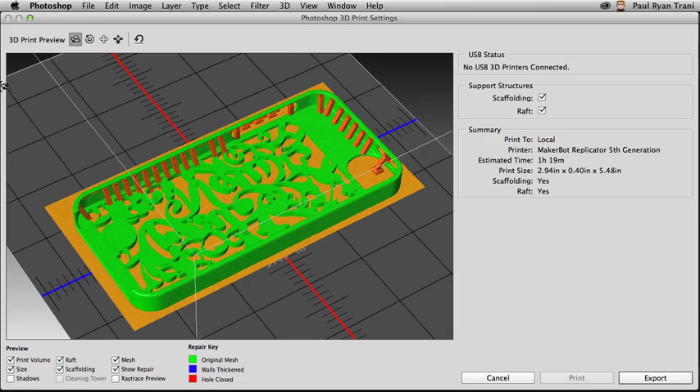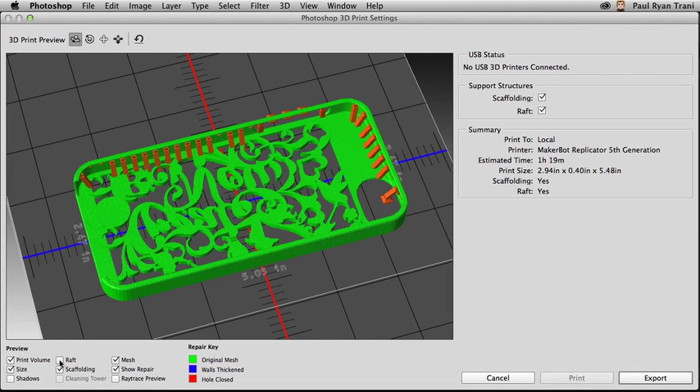All right, here is my object, and a couple things have happened. In fact, it looks a little unique. You can see the original mesh, which is the green, and notice I can click on Ray Trace Preview to get a more accurate preview of this particular object. But I'm also noticing this orange right down here, and what is that? Well, that's the raft. I'll actually turn that off, and you can see I can print the raft, which will just print out one layer, so this design will get positioned and printed out exactly right.

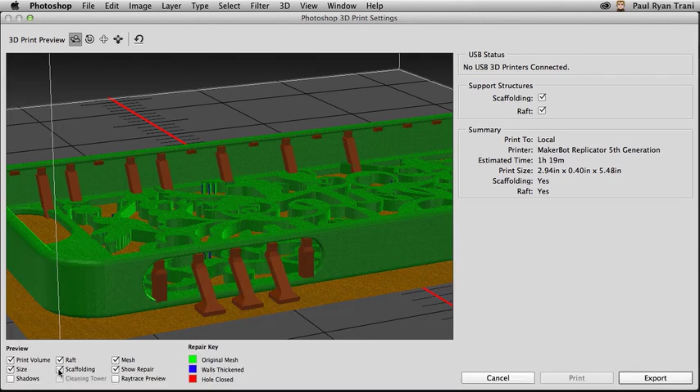But there's some other things going on here as well. As I rotate this around, notice how I can manipulate it and zoom in. Say, for instance, look what I have here. That's the scaffolding. Okay, so I can turn that on and off. And what that is: 3D printers can't just print in midair, if you will. So printing out this bar, it has to build up the scaffolding and then it can print that particular part. So this is great that this is actually integrated. Photoshop adds it for me so I don't have to put it in there. And now that's going to lead to a successful print for me.

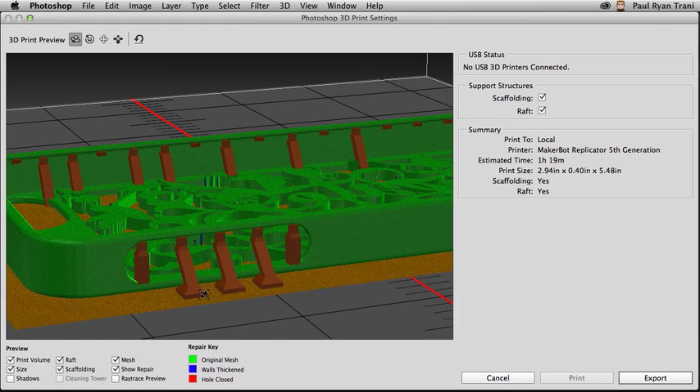Also notice the walls are thickened in certain spots, and that's what that blue is, again, leading to a successful print. I can click print or export to export out the STL if I want to print it out later. But what if you don't have a 3D printer? I'm going to click cancel. And check this out. I can take this iPhone case and send it to Shapeways or Sculpteo, two companies that will do the fulfillment for me.

This is great. I can select Sculpteo, they're based in Europe, and I can go into the printer details right in here and see all the different materials. So I can print out in ceramic, in multicolor. This is key. And Photoshop allows for printing in multicolor, which is great. Different plastics, different resins, clear down to wax, silver, metals, awesome.

In fact, I'm going to change this to Shapeways, based in Brooklyn, and you can see the ceramics, 14 karat gold, silver, steel, you name it, even full color sandstone. So I can create something with color and print it out as well. And keep in mind, it changes the visual representation. So for gold plated, well, this might be a little large for that printer, but if I change this to the coral red, strong and flexible plastic, that's what I want, and you can see it will easily fit, okay?

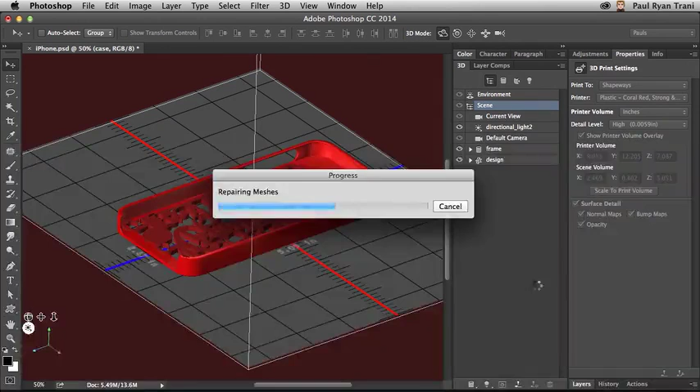And it will add all those details and anything I've refined. If I had a bump map in here to give it some texture, it will get printed out accordingly. But again, the great thing is I can come right down here and click Start Print. It will go through the same process of unifying the scene, making it one solid mesh, repairing it where it needs to be repaired. And here you get the representation again as well.

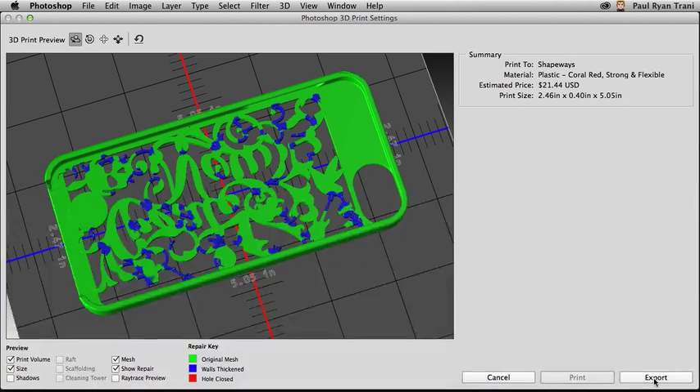And right over here, a little summary of how much it will cost, around $20 for this plastic case. That's all based on the amount and type of material you use, but you can easily see that it thickened all of these walls, so it will be a successful print. All I need to do is click export. It will export out that STL file. That's a 3D file for 3D printers.

And then it asks me to complete the ordering process by going to the Shapeways site. Takes me right to the Shapeways site where I click upload and I locate that particular file. I'll just select upload, and the object's now on Shapeways site where I can select the material I want it printed in. So I encourage you to peruse Shapeways' site for all the different materials as well as Sculpteo's.

And what I've selected is the red, strong, and flexible plastic. You can see it here. Created and printed in Photoshop, fulfilled by Shapeways. So go ahead and try it out for yourself today.